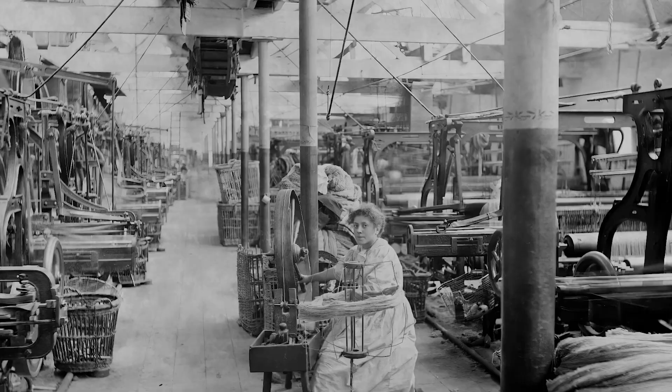1868, and the engine room of a Manchester spinning mill is already running when the morning shift arrives. The air is dense with cylinder oil and the fine white dust of scorched cotton lint, the floor transmitting a low subsonic vibration through the soles of every boot. Not a sound so much as a pressure, a permanent physical fact of the building itself, something the men stopped noticing years ago the way they stopped noticing the smell.

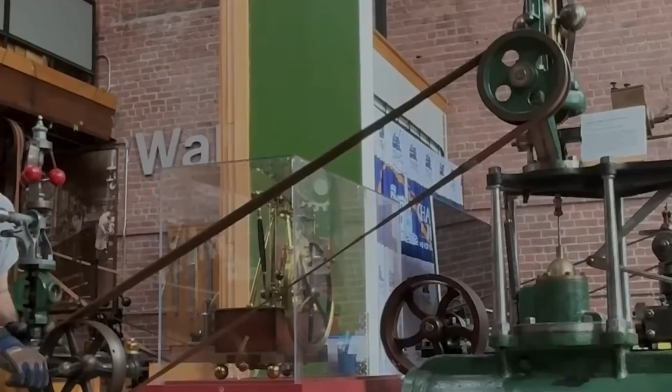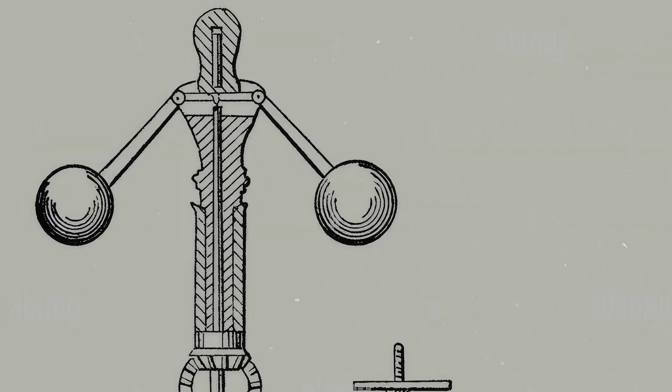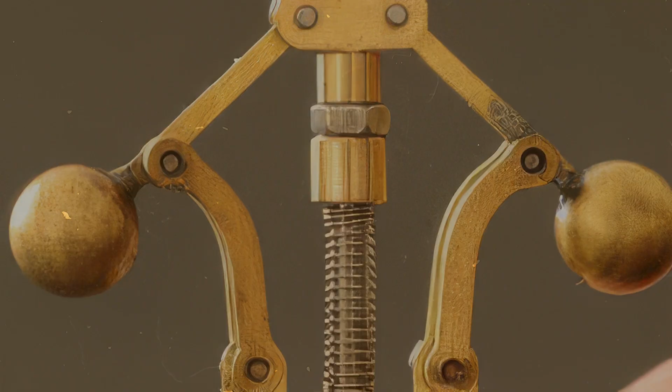The engine man stands with one hand resting on the throttle housing, not because it needs him, but because that is where he has always stood. The governor, a paired set of brass balls spinning on jointed arms above the valve linkage, rotates in its calibrated arc at 340 revolutions per minute, exactly where it should be. Exactly as it has been every morning for years, every afternoon, every night shift, in every season, in every condition of load and weather that the mill has thrown at it.

This machine has completed, by any reasonable estimate, 50 million regulation cycles without failure. That is the point. That is precisely the point.

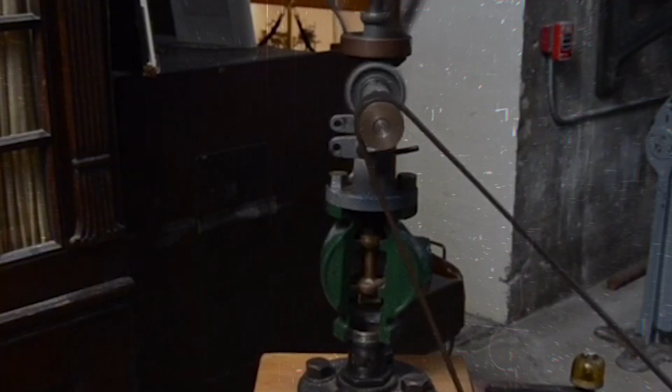A boy oiler passes the governor column on his circuit of the floor, a bucket in each hand, not glancing at the linkage rod because there is no reason to glance at the linkage rod. The binding has been accumulating in the guide collar for six weeks, a compound of lint fiber, degraded oil, and the slow misalignment of a steel pin worn a fraction of a millimeter past its tolerance.

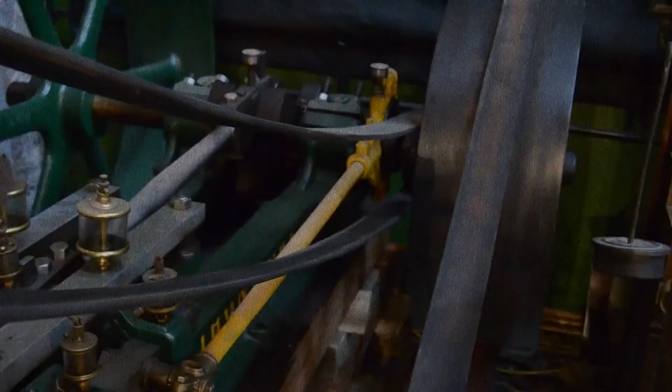Nobody logged it. The engine accelerates past 420 revolutions per minute. The flywheel, 8 tons of cast iron, 14 feet across, leaves its shaft in 3 pieces. One section travels 60 feet through the mill wall.

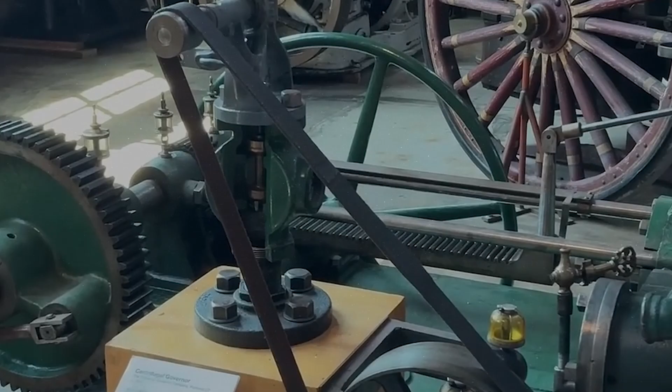4 men are in the engine room. 2 leave it standing. It was not built to let engines run away. It was built to make runaway impossible.

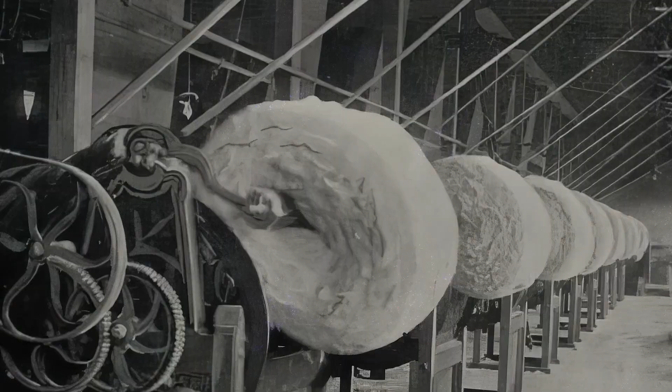So why, across 4 decades and a dozen industries, did the centrifugal governor fail at the precise moment that control mattered most? To understand how this ended, you have to go back to 1788, to James Watt, to Birmingham, and to a commercial problem that had no solution yet.

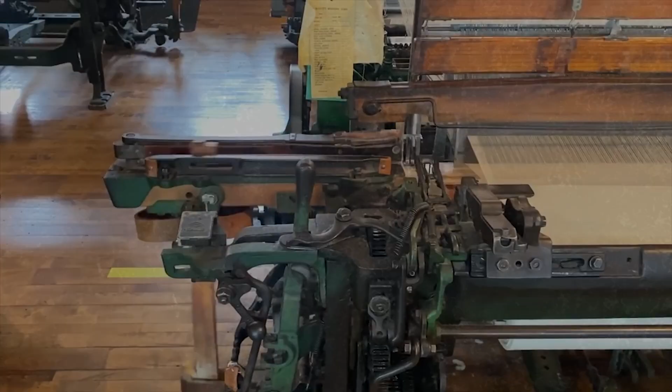Arkwright's mills required constant shaft rotation. Thread quality depended on it absolutely. A variation of more than 10% above or below the design speed would snap warp threads, jam shuttle timing, and reduce an entire shift's production to unsellable scrap.

Boulton told Watt, with characteristic commercial directness recorded in their surviving Birmingham correspondence, that without a regulator, the rotative engine had no future in the mills.

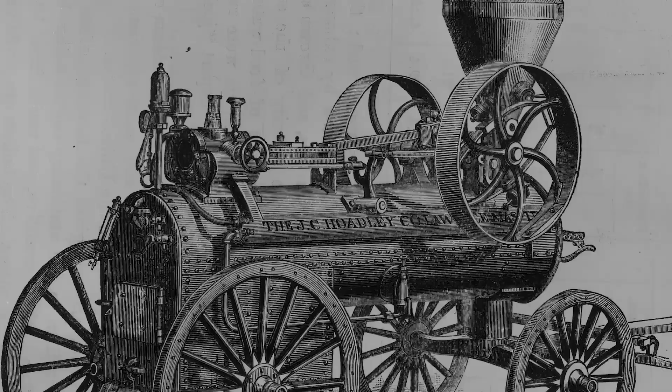Watt solved it with a mechanism borrowed from millwrights who had been using similar devices on windmills and grinding mills for decades. Two brass balls, each weighing roughly 3 pounds, mounted on hinged arms attached to a rotating spindle geared to the engine shaft. As shaft speed rose, centrifugal force drove the balls outward and upward.

As they rose, the linkage geometry pulled a throttle valve progressively closed, reducing steam flow, slowing the engine back toward its set point. As speed fell, the balls dropped, the valve opened, and the engine recovered.

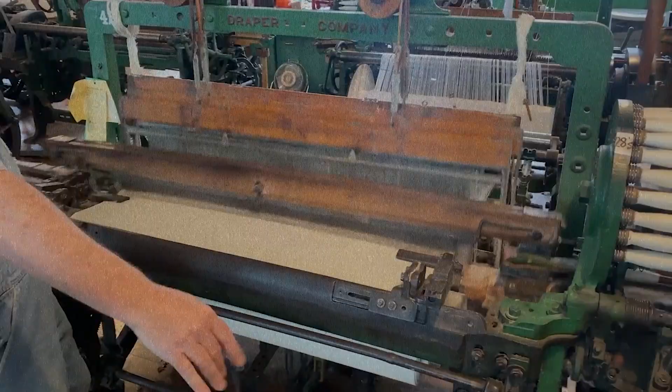The physics were elegant. The restoring force scaled with the square of the rotational speed, which meant the governor responded more aggressively the further the engine deviated from its target, a self-correcting loop that seemed, to everyone who first encountered it, like a small mechanical miracle.

Watt filed the design in 1788. William Murdoch, his most trusted practical engineer at the Soho foundry, oversaw early production and installation. The mills bought it immediately.

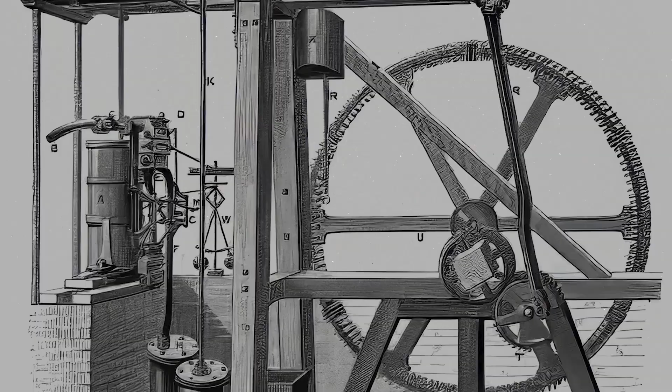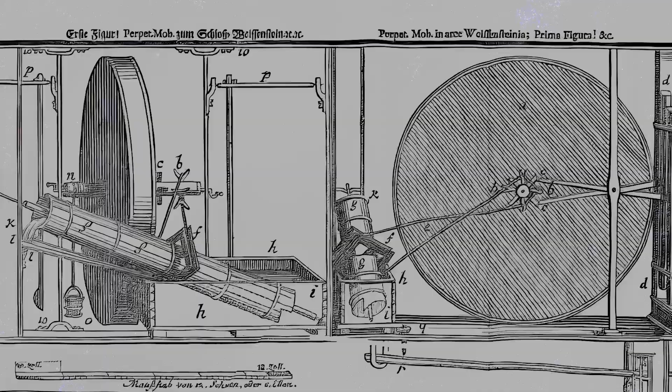Here is the first twist, and it is the one that makes everything else inevitable. The governor was not a safety device. It was a quality control instrument. It existed to keep thread uniform and looms synchronized, to protect product, not people. Its secondary effect, preventing catastrophic overspeed, was a consequence of its primary function, not its stated purpose, and that distinction mattered enormously from the first day an engine left the foundry.

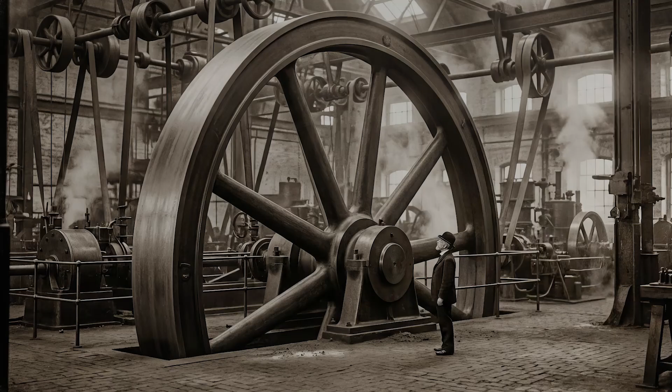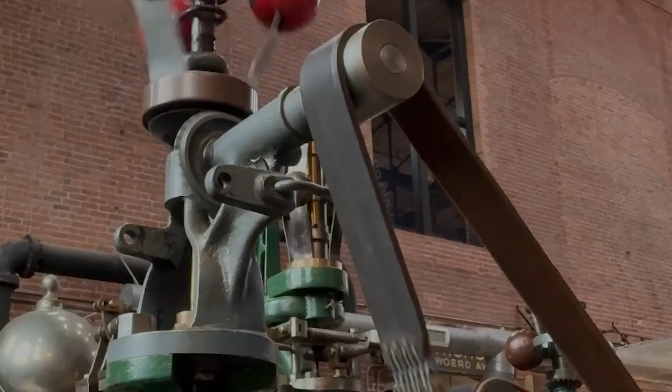Because the flywheel, which the governor nominally protected, was not a passive component. It was an energy reservoir, a deliberate accumulator of rotational mass, and the energy stored inside it scaled with every pound added to its rim and with the square of every revolution per minute added to its speed. A 6-ton flywheel spinning at 120 revolutions per minute stores kinetic energy equivalent to a substantial artillery shell. The larger the flywheel, the smoother the power delivery across the mill floor, and smooth power delivery was exactly what the textile trade was paying for.

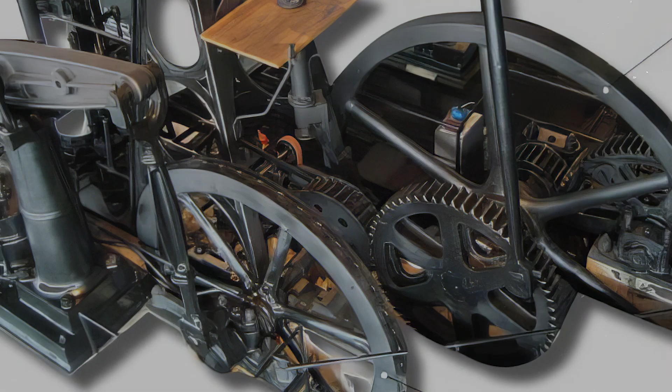So mills demanded heavier flywheels, larger diameters, greater stored energy, and the governor, a 3-pound brass mechanism connected to its throttle by a steel rod running through a bronze-bushed collar, was the only thing standing between all that accumulated energy and the building wrapped around it.

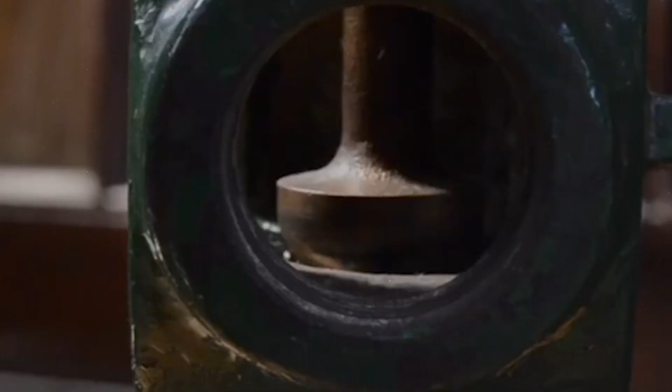Watt had built a machine that could think. What he had not built was a machine that could stop thinking.

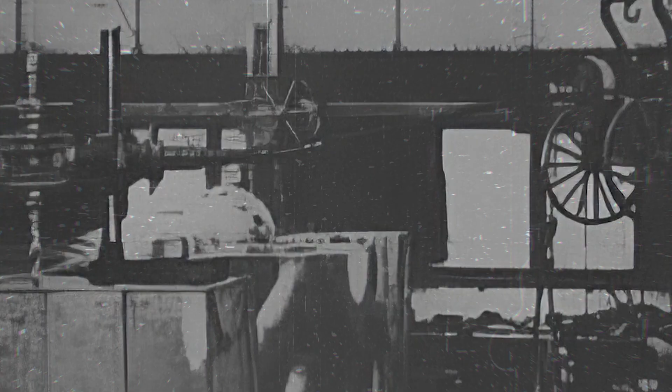The first generation of governor-fitted engines entered the mills with no centralized maintenance protocol. The Soho foundry trained its own engineers, but once an engine was installed and producing revenue, the mill owner paid for the machine, not for ongoing calibration expertise from Birmingham. Local millwrights who serviced these engines learned by proximity and habit, not by theoretical instruction from anyone who understood the underlying mechanics.

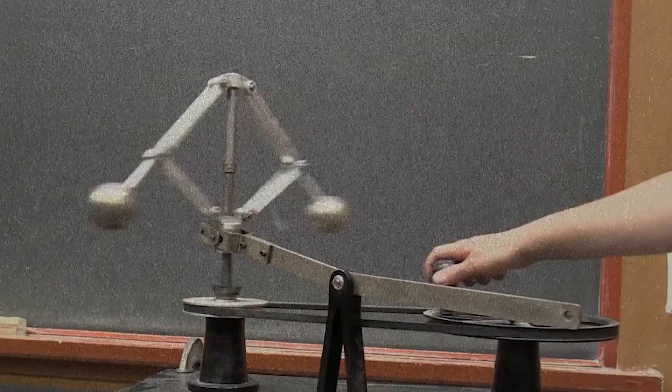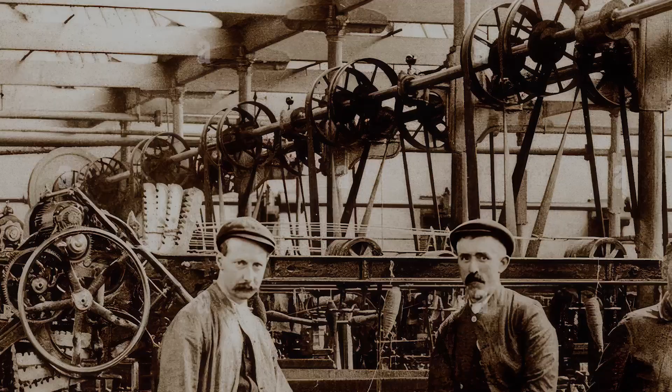The linkage that connected the governor balls to the throttle valve ran through guide collars, bronze bushings through which a steel rod translated rotational motion into linear valve displacement. Those collars required weekly lubrication and monthly inspection for wear and alignment. In practice, they received neither on any consistent schedule. The machine worked. No one asked why or for how long.

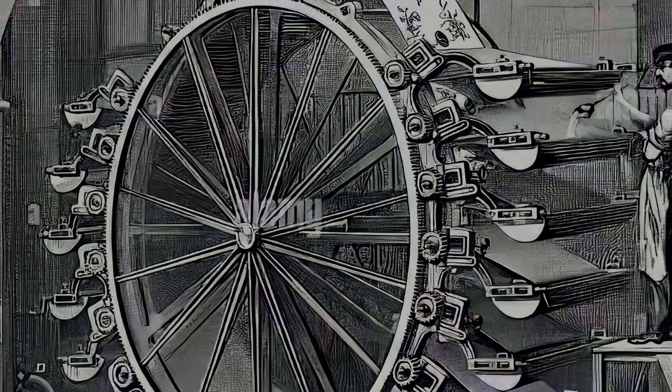After Watt's patents expired in 1800, the governor became a commodity component, and the industry that grew around it had no interest in preserving the calibration logic behind the original geometry. Foundries across Lancashire, Yorkshire, and the Midlands copied the design from working examples rather than from Watt's engineering drawings, often without understanding the precise relationship between ball mass, arm length, spindle gear ratio, and the specific throttle resistance of the valve the governor was meant to drive.

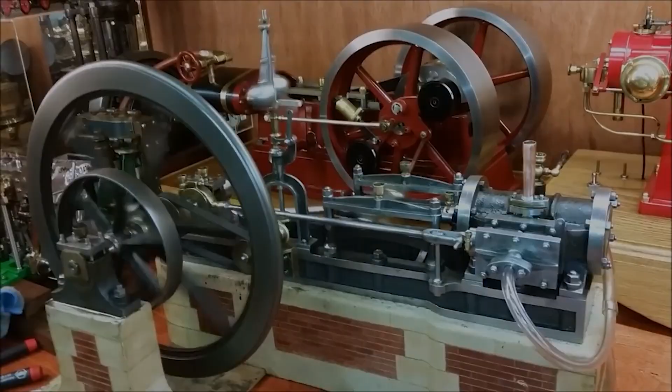Governor ball weights ranged across manufacturers from 2 pounds to more than 8, installed in mills running engines of wildly varying power outputs and flywheel masses, with no engineering standard governing any of it.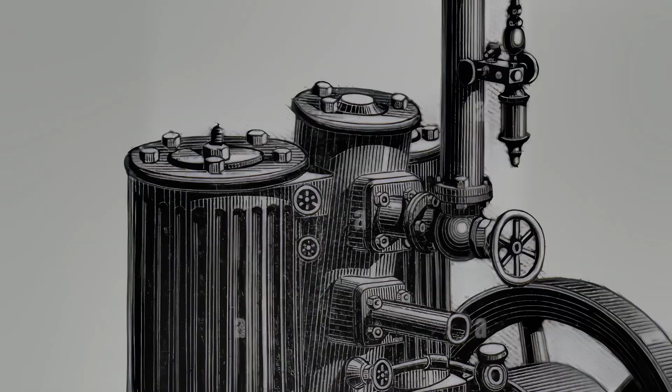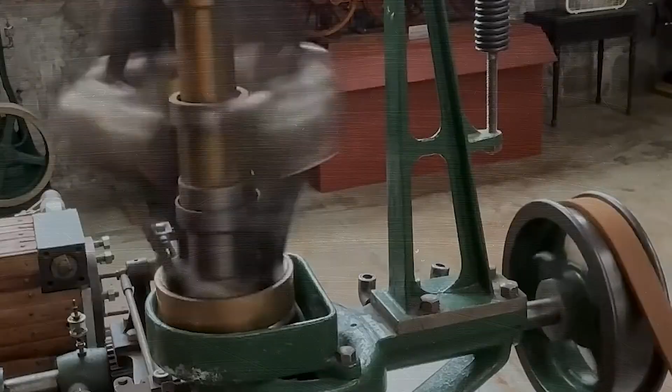By the time parliamentary returns on steam engine usage were compiled in the late 1830s, Britain had hundreds of rotative engines running with centrifugal governors in textile mills alone, and the men responsible for maintaining those governors operated entirely from accumulated habit. There were now, by any reasonable estimate, 1,000 governors in Britain. There was no one who knew all the ways they could fail.

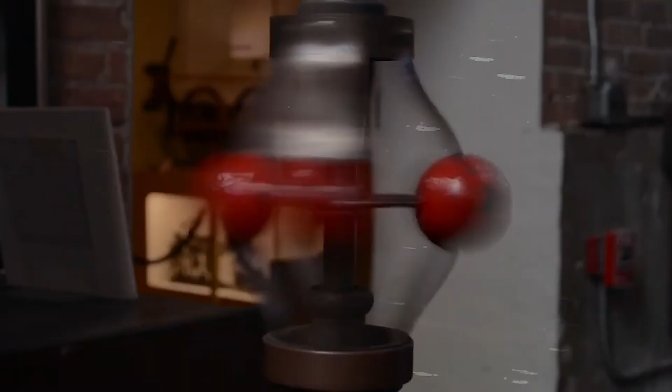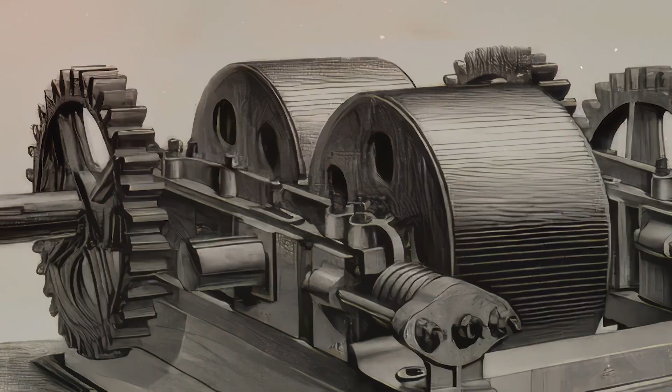The mill itself, by the 1840s, had become a single interlocked mechanical organism with the engine at its heart and the governor at the center of the engine's authority. A horizontal engine shaft ran at ceiling height through the length of the building, driving line shafting on every floor through bevel gears and wide flat leather belts that slapped rhythmically against wooden guides at every quarter turn. Every spinning frame, every power loom, every preparing and winding machine in the building drew its speed from that one shaft.

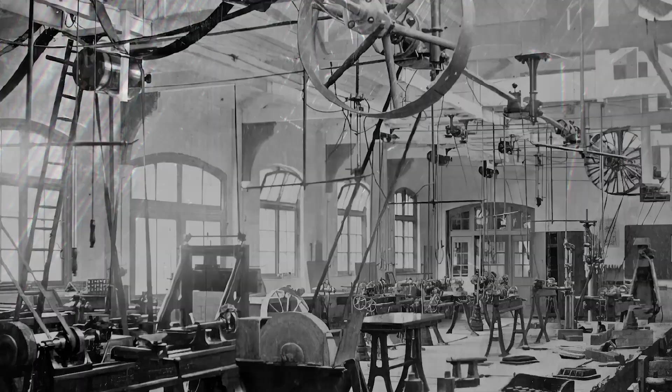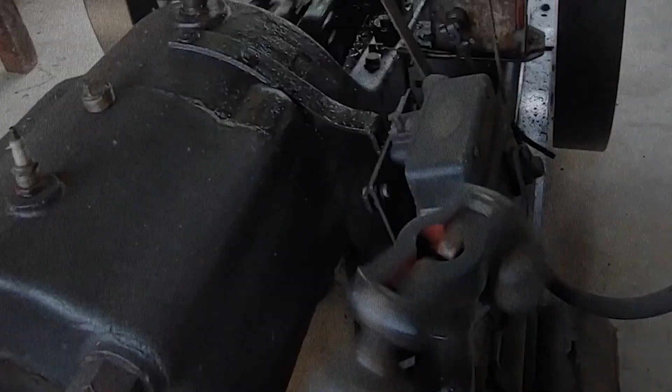And every one of those machines had been timed and calibrated at the engine's design speed. A speed increase of 15% above the design point meant every machine in the building accelerated by 15% simultaneously. Thread broke. Shuttles arrived at their reversal points a fraction of a second early and jammed. Operatives whose hands moved near moving machinery at rhythms they had learned over years of work suddenly found those rhythms wrong in ways they could not immediately identify.

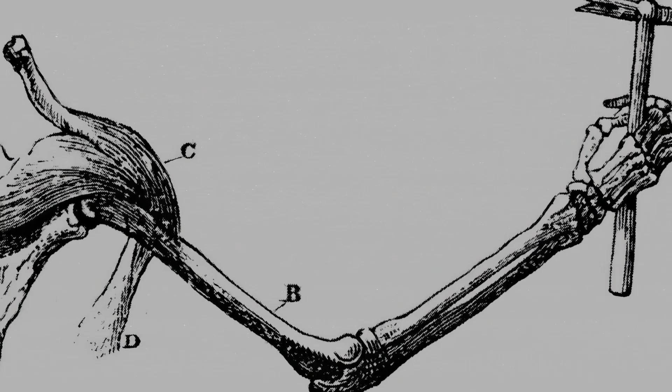Factory inspector reports from the Home Office records in this period document hand injuries with a numbing regularity that conceals their mechanical cause entirely. The machine was not malfunctioning, it was running fast. The governor was not correcting it, and nobody had yet decided whose fault that was.

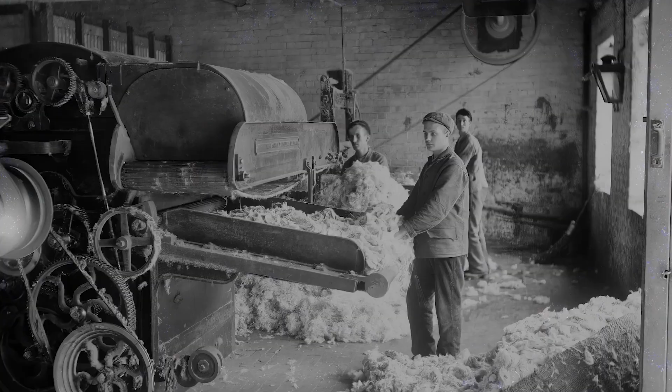The engine keeper, whose name in most surviving records appears only as a surname or a job title, performed his daily circuit of the engine room with the methodical calm of a man who had done the same walk 1,000 times. Oil reservoirs checked, valve packing inspected, gland nuts given a half turn, governor spindle glanced at. That last item glanced at.

The governor was trusted because it had never visibly failed. That was the most dangerous sentence in British industrial engineering.

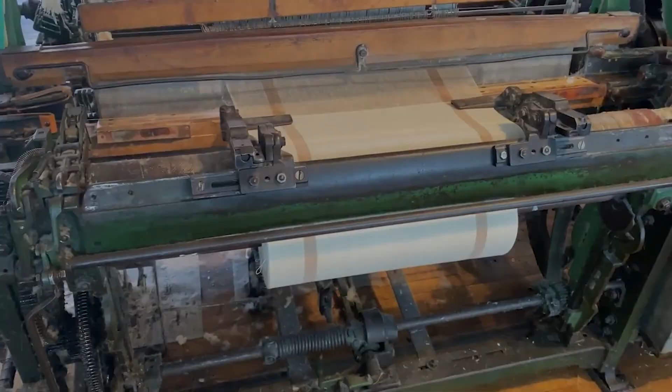What the engine keepers were observing without recording was a phenomenon that engineers would eventually call hunting, the governor oscillating above and below its set point rather than converging to it, causing the throttle to cycle open and closed in a rhythmic surge that transmitted through the engine as a periodic variation in shaft speed, felt on the mill floor as a subtle but measurable pulse. A deviation from the constant thrum that should have been a warning and instead became, through sheer repetition, background noise.

James Clerk Maxwell described this instability with complete mathematical precision in a paper published in the Proceedings of the Royal Society in 1868, demonstrating through differential equations that a governor without sufficient damping in its linkage would, under the load variations typical of any working mill, oscillate rather than regulate, and that the oscillations would worsen, not stabilize, as the linkage wore and friction in the guide collars increased.

The paper was precise, complete, and entirely correct. It was read by mathematicians, by professional engineers in the learned institutions, by men who spent their working days in offices rather than on mill floors. It was not read by millwrights.

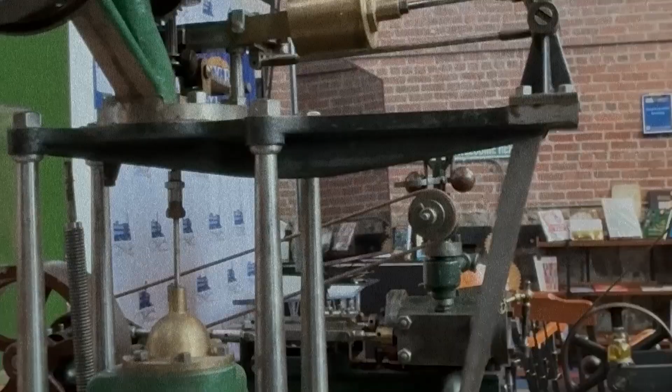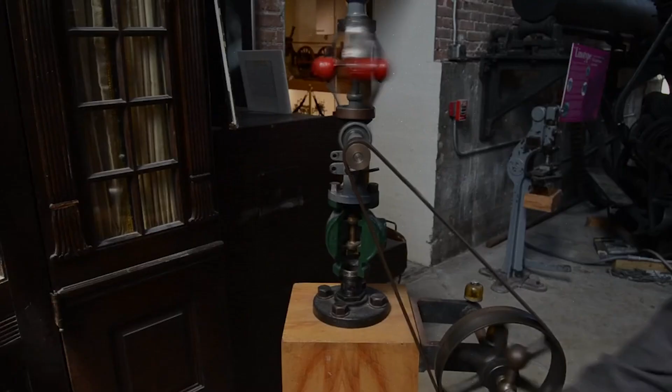When a mill engine surged and a foreman filed a complaint, the blame landed reliably on the engine driver, a careless hand on the throttle, an improperly managed fire, insufficient attention to the steam pressure gauge. The governor was never questioned because the governor was the solution.

Questioning it would have meant admitting that the solution had a failure mode, and the institution had no mechanism for that admission. A design flaw had become a personnel problem, and it remained one for two more decades while the flywheels grew larger and the stored energy climbed.

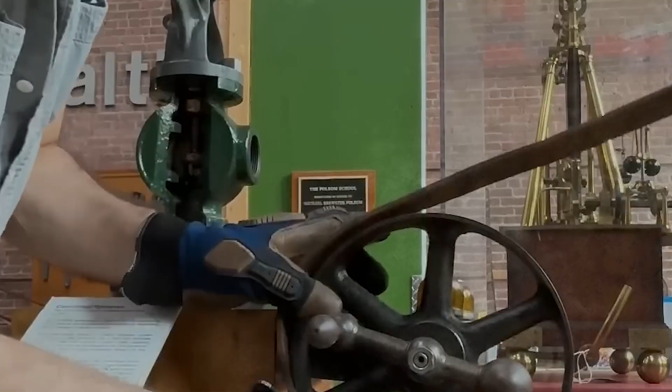By the late 1850s, mill owners across the Lancashire cotton districts were ordering flywheels that reached 12 and 14 feet in diameter, with masses exceeding 10 and sometimes 15 tons. Because the commercial logic was unambiguous, a heavier flywheel meant smoother shaft speed under varying load. Smoother shaft speed meant better product quality. Better product quality meant contracts and margins.

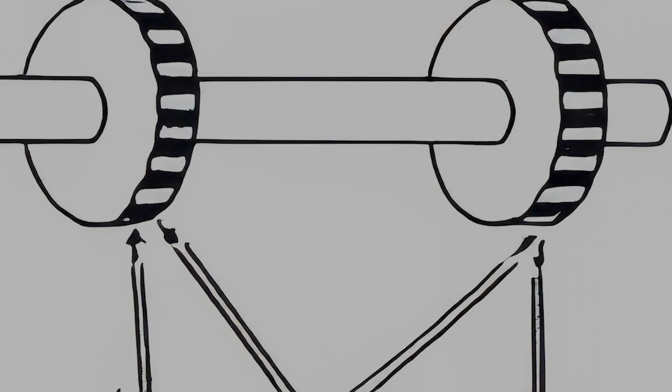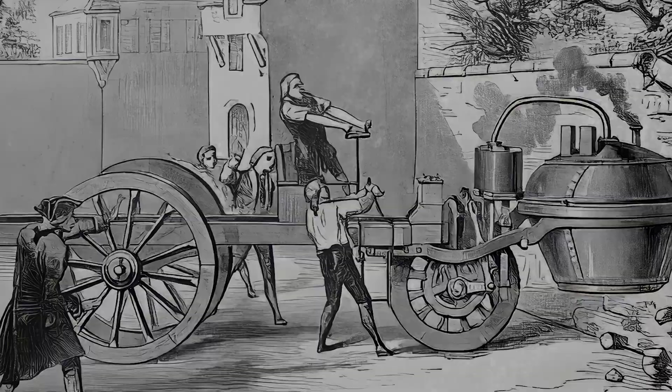The kinetic energy stored in a rotating flywheel scales with the square of its angular velocity, which means an engine running 20% above its design speed does not carry 20% more destructive energy in its flywheel. It carries nearly 50% more.

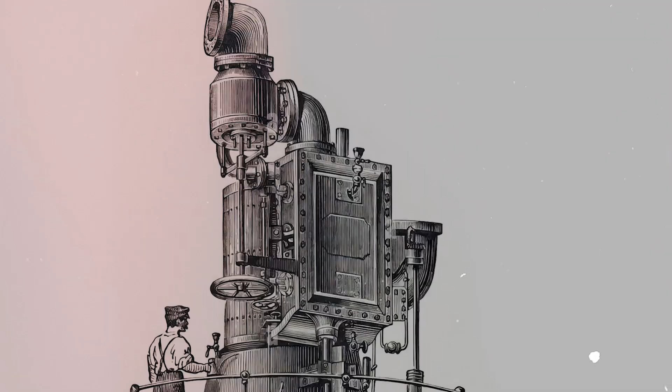The governor's functional strength, its ability to hold the engine at a consistent target speed and thereby allow the flywheel to perform its role as a power buffer, was structurally inseparable from the catastrophe that its failure would produce. The larger and more effective the flywheel, the more essential the governor's function. The larger and heavier the flywheel, the more catastrophic the governor's failure.

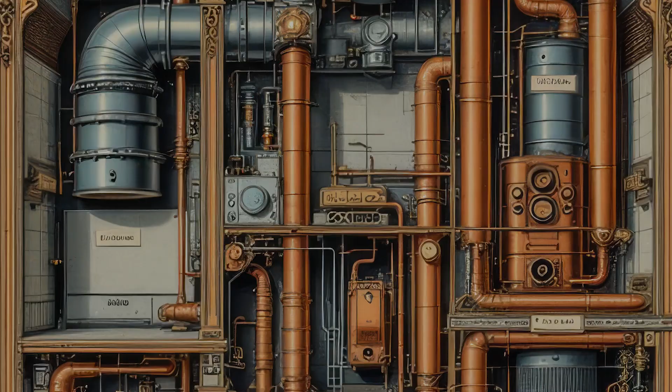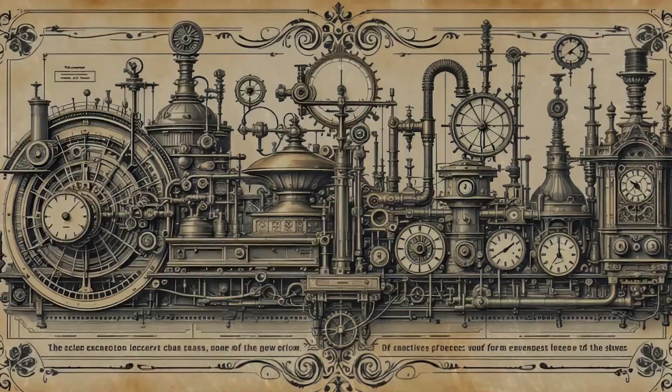No engineering standard in this period capped flywheel mass relative to governor authority. No insurance requirement mandated governor inspection intervals or linkage replacement cycles. The industry had built the most rational, most productive, most carefully engineered power system available to it. It was also, under the precise conditions that produced binding in a guide collar, the largest concentrated energy release mechanism in any civilian building in England. They had built the largest bomb. They called it the safest system in the plant.

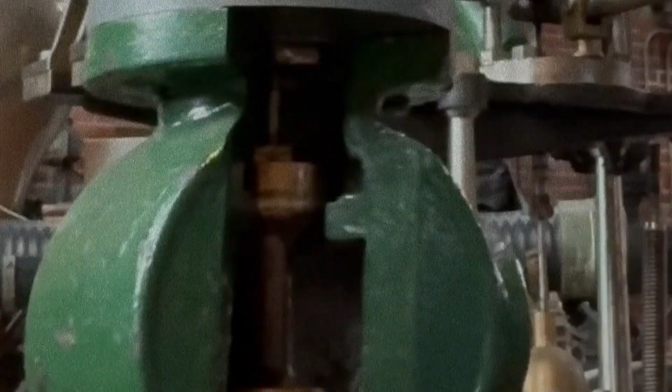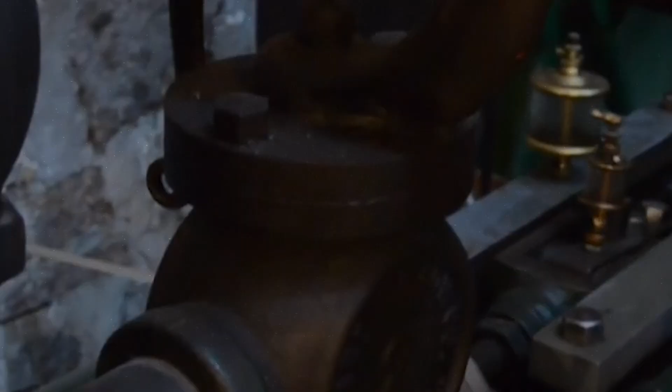The failure, when it arrived in its fully realized form, followed the sequence that the engineering logic had been composing for three decades. The linkage seizes, not suddenly, but through the patient accumulation of wear and contamination across weeks or months. Lint fiber packing into the collar gap, oil degrading from a lubricant into an abrasive paste. A pin losing its clearance fraction by fraction until the friction in the guide collar finally exceeds the restoring force that the governor balls can generate at normal operating speed.

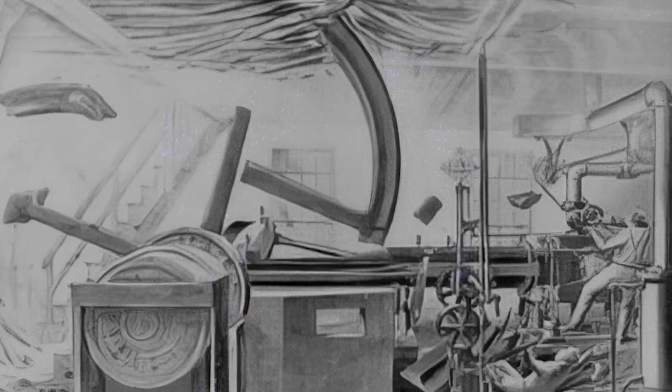The balls freeze in their low position. The throttle valve, commanded by a rod that has stopped moving, stays open. Steam continues to flow. The engine accelerates. The governor, spinning faster now as the engine climbs, generates increasing centrifugal force, but the seized linkage cannot transmit it.

The balls swing outward against the mechanical constraint of the frozen collar. The spindle turns faster, and the engine continues to climb past its governed range into territory where the only remaining limit is the tensile strength of the flywheel rim itself. Cast iron fractures without warning under hoop stress.

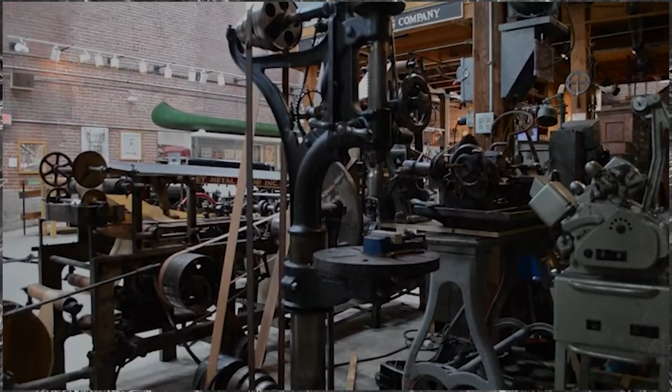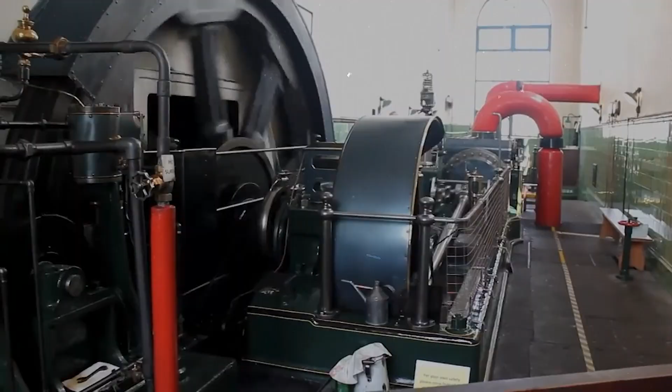There is no plastic deformation, no slow tearing, no creak of material giving way. The rim reaches its limit and simply becomes shrapnel, radial cracks propagating at the speed of sound through the casting, the flywheel disintegrating in a single event that contemporary witnesses consistently described as resembling artillery fire. Debris traveled 40, 60, and in documented cases more than 100 feet, passing through brick walls and timber floors.

Workers on adjacent floors, men and women who had no knowledge that anything was wrong in the engine room below, were killed by cast iron moving through the structure of the building they were standing in. The governor had not malfunctioned. It had done precisely what a seized linkage commanded it to do: nothing.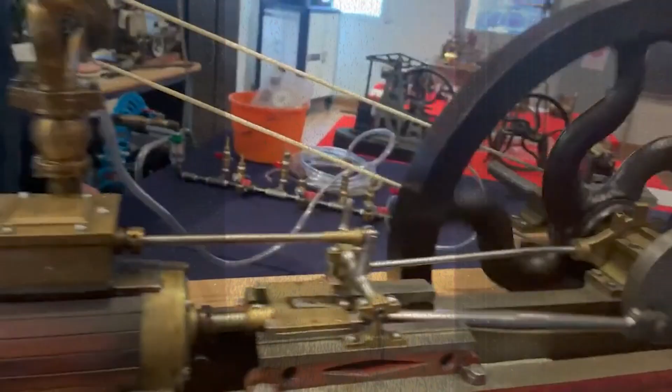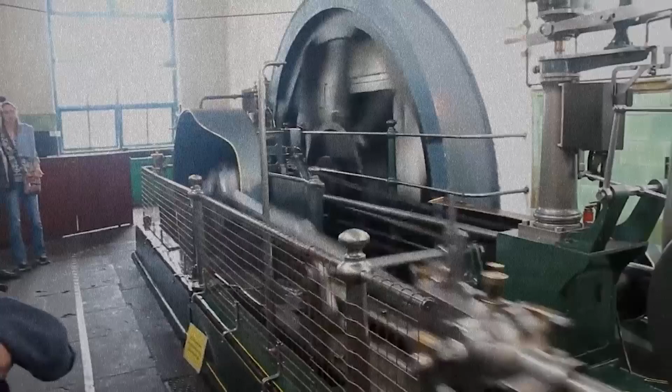The coroner's inquest that followed each such event was conducted with genuine care and appropriate legal thoroughness. Debris fields were walked and measured, trajectories documented, and witnesses gave testimony recorded verbatim. The mechanical sequence of events was, in many cases, correctly identified by technically literate inspectors who understood that the governor linkage had failed to respond and that the flywheel had consequently exceeded its safe rotational limit.

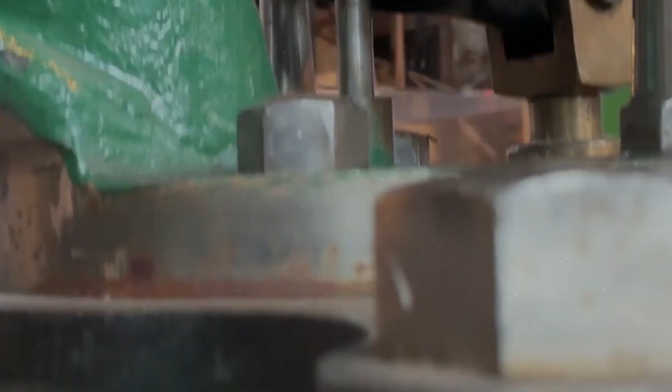The cause of death was established without ambiguity, and the verdict was accidental death, with a letter recommending that the mill owner ensure regular inspection of moving engine components. The governor design was not named as a systemic risk.

No central authority collected and cross-referenced inquest records from different mills in different counties to build a pattern. No engineering institution was mandated to analyze the accumulated evidence and propose design standards. Each failure was a discrete event. Each inquest was a discrete proceeding.

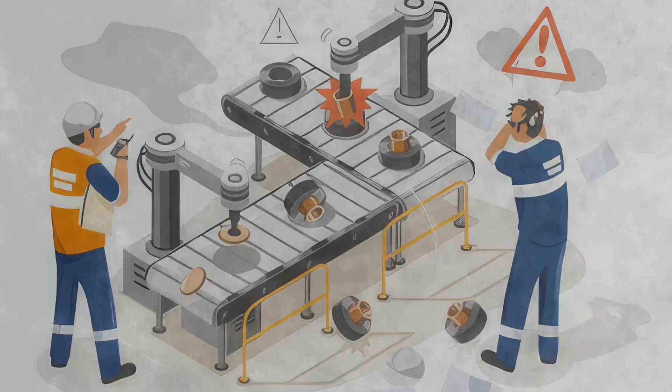They wrote down everything that happened. They did not write down how to prevent it happening in the next mill, with the next governor, on the next morning shift. Improved governor designs were available before the era ended.

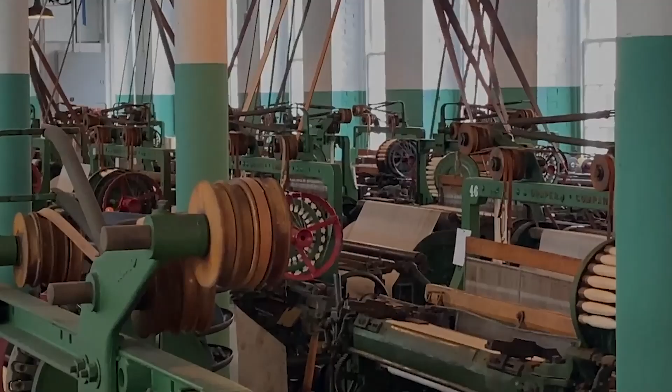Spring-loaded mechanisms that added damping directly to the linkage, addressing Maxwell's instability at its mechanical root, appeared in engineering catalogs through the 1870s and 1880s. Wrought iron and later steel flywheels, which could deform plastically under overstress rather than shattering into projectiles, entered the market for new installations. The Factory and Workshop Acts were amended repeatedly across this period, extending regulatory reach into more areas of mill machinery.

But the internal dynamics of the engine governor remained outside the practical scope of inspection. Adoption of improved designs was voluntary, economically rational only when an engine reached the end of its service life and replacement became unavoidable. Retrofitting a working mill meant a production shutdown, and a production shutdown had a calculable cost.

That the mill owner could set against the probability of failure as he understood it from his own experience, which was, in most cases, no failure yet. The solution existed. The economics of installing it did not.

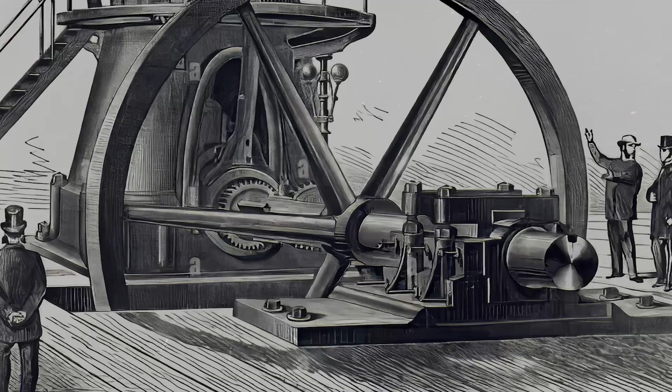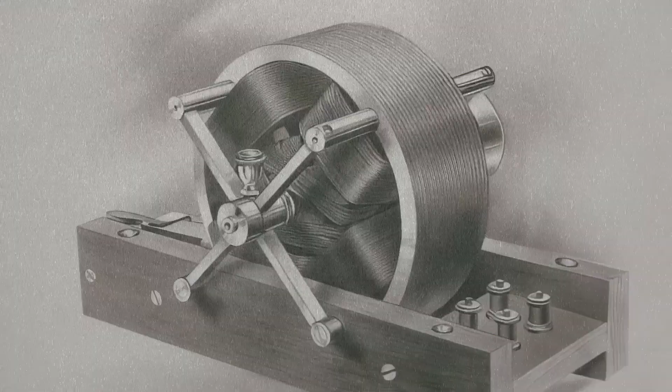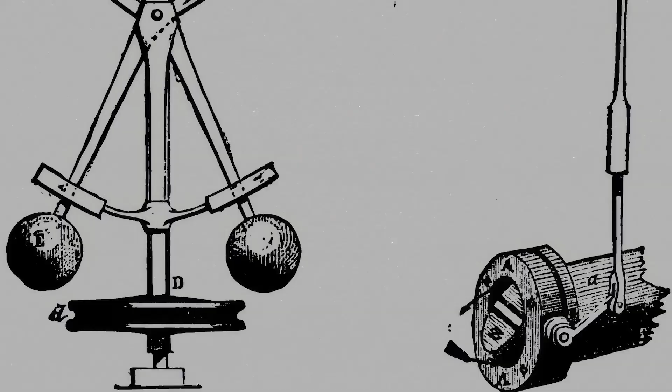What ended the centrifugal governor's reign was not reform but elimination. The AC electric motor, commercially viable for industrial drive applications by the mid-1890s, required no governor at all. Its rotational speed was determined by the frequency of the alternating current supply, 50 cycles per second in the British system, producing a shaft speed that held within fractions of a percent under any normal production load, without any mechanical regulation whatsoever.

The entire problem, linkage friction, hunting instability, cast iron hoop stress, the catastrophic release of stored flywheel energy through a seized collar, was architecturally removed from the system. Not regulated, not redesigned, removed, by eliminating the variable that had required control.

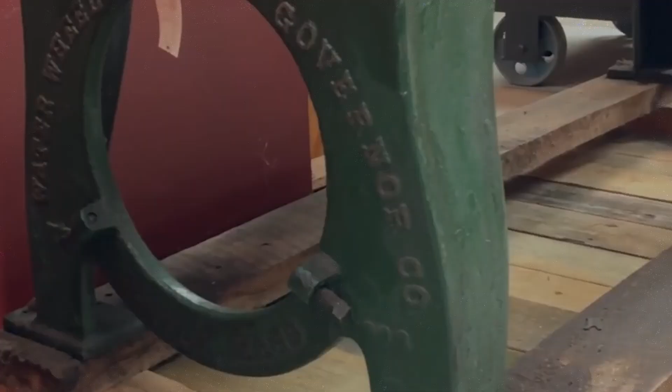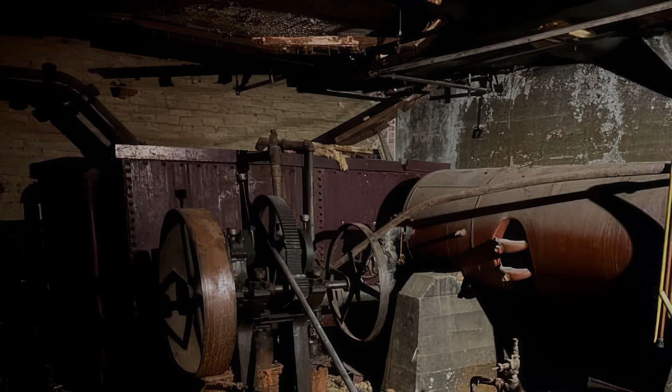Mills that converted to electric drive in the first decade of the 20th century decommissioned their steam engines, dismissed their engine keepers in the old sense of the role, and in several documented cases simply bricked over the engine pit and the flywheel within it, the mass too great to extract, without demolishing the floor above.

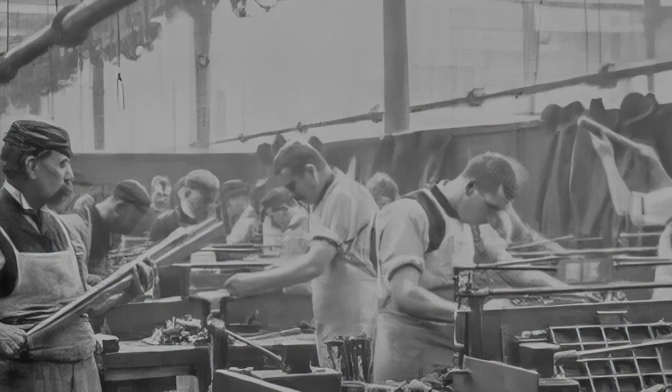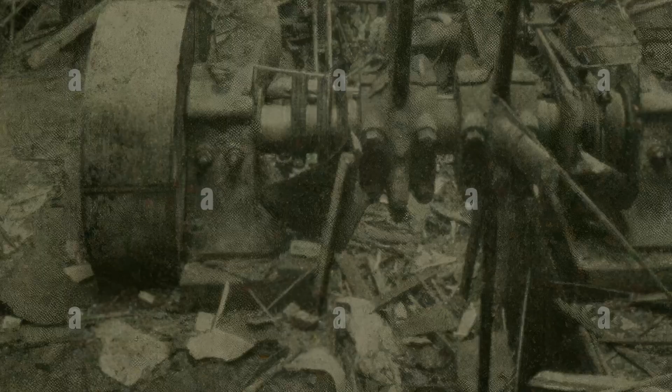The brass balls of the governor hung motionless for the first time in 80 years. The floor above retained the slight grooves worn by decades of vibration-driven settling, the only remaining physical record of what had run there. The equation Maxwell had written in 1868 remained correct.

It simply no longer applied to anything that was killing people. The machine did not fail. The institution that ran it did. And the only thing that stopped the dying was a technology that made the argument irrelevant.